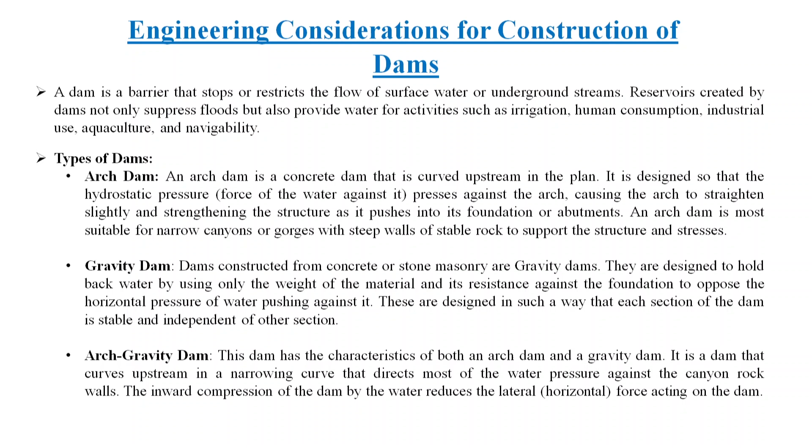So the types of dams are arch dam, gravity dam, arch gravity dam, and then barrages, embankment dams, cofferdam, concrete face, rock fill dams, earth fill dams, like this. So there are various kinds of dams.

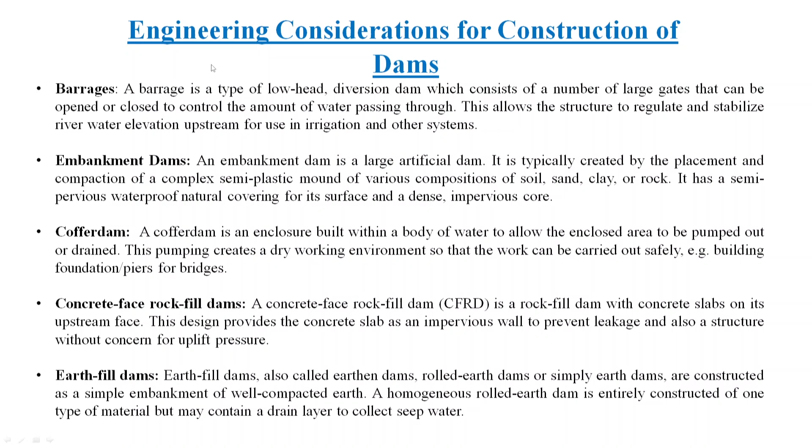I am not going into the individual properties, but if I look at some of them, for example, embankment dams are mainly prepared to restrict an event of flood, or to restrict water, or to store water for further irrigation purposes.

Then you can think of the buttress dam. Here you have a dam with this kind of water storage, and these kind of dams are also mainly used for irrigation purpose. Sometimes they also play a significant role in controlling an event of flood.

Then you have gravity dams like this, and also arch dam. These dams are more used for hydroelectric power generation. In case of a gravity dam, the front of the dam towards the downstream side of the river will be the heel, and the toe is towards the upstream side of the dam. Then you have the crest, and a large bottom or trough of this dam, which is why it is referred to as the gravity dam, having a vertical upstream side and an inclined downstream side, like this.

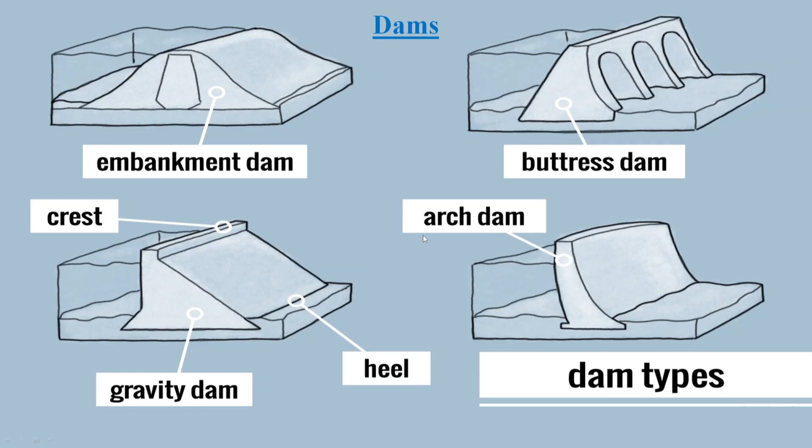In case of arch dam, these are arcuate or curved kind of dams, convex towards the upstream side and concave towards the downstream side. This kind of dam is generally used for generation of hydroelectric power.

So obviously there are several considerations for the construction of dams. The first one is the economic feasibility, whether it is possible to build a dam, because it involves large cost, labor and materials. Then bedding planes and strength, like I was referring to the different scenarios of slope stability based on the orientation of the bed, mainly the strike and dip direction. So your bedding planes and strength of the surrounding materials where you want to build a dam is a very important consideration.

Then again your feasibility and constructability, how large or small a dam will be depends on the feasibility of where you want to build that dam, and obviously durability and resistance to erosion. So preparing or constructing a dam in extremely turbulent water in a hilly region is a problem. Nowadays there are ways to support this kind of turbulence, but it is always a little bit problematic.

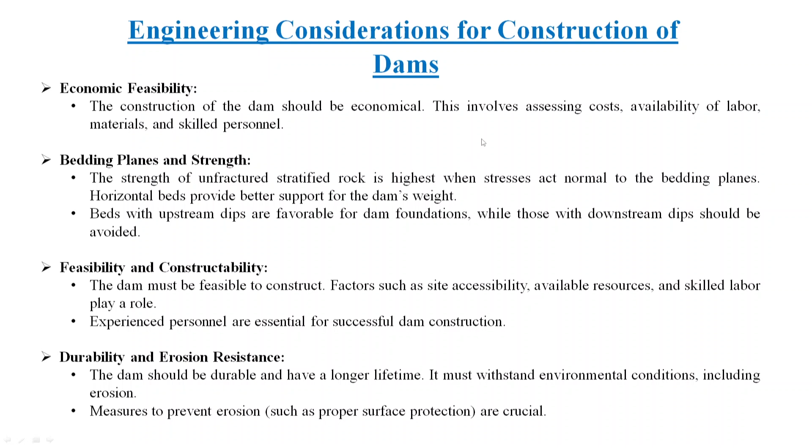But when the turbulence of the rivers drops down a little bit - I am not saying it goes into the mature stage, but even in the youth stage the turbulence is a little lower - in those areas you can prepare a dam relatively easily. And obviously there has to be measures to prevent erosion, because for a dam you are storing water, so there will be erosional activities related to the streams and rivers. These are the various considerations for construction of a dam.

Stability, saturation line and downstream face are also important. Stability depends on several other things, but the saturation line where water meets the dam should be on the downstream face. Proper drainage and seepage control prevent internal erosion and maintain stability.

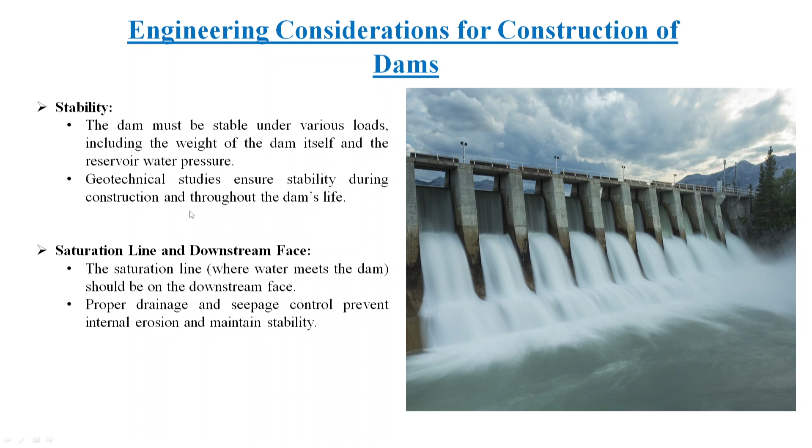So this is again a very important consideration whenever you are constructing a dam. So now if I look at this diagram again in relation to the orientation of the beds. So if you have a scenario where you have this W and T, T is nothing but the thrust force of the water reservoir, because you are storing a large amount of water. So there will always be a thrust on the walls of the dam, so that is considered as your thrust force. And you also have your weight force, the weight of the dam itself. It's a large-scale structure, so it will impose a large weight on the surface itself.

So based on these two components, if I simply make out the resultant vector, that is referred to as R here, or the resultant force of the dam, then if the angle of the resultant force is at a high angle with respect to the beds on which it is made, in that case it is relatively more stable with respect to the other cases. And this is possibly the most stable configuration, when the resultant direction of the force from the thrust force and the weight of the dam is at a high angle or even orthogonal to the dip of the beds.

So whatever water leakage will happen on the upstream side, it will not affect the dam itself and the downstream side. Whatever water leakage can happen will only happen on the upstream side. Then you have this kind of an orientation, where the resultant direction of the force is at a low angle with respect to the horizontal beds that are present. So with horizontal beds, though it is also quite stable, there is still some possibility of some leakage in the upper layers of this horizontal strata.

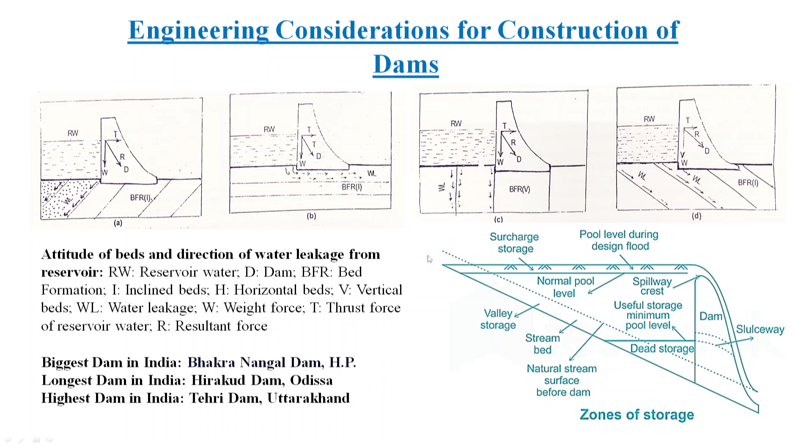Now, coming to tunnels, because tunnels are being made very frequently nowadays in India for both roadways as well as rail tracks. A tunnel is an underground passageway that is excavated through soil, rock or both. Tunnels are used for transportation, water conveyance, sewage and utility conduits as well. They have a long history of use dating back to ancient civilizations and have become increasingly important. Tunnels are being frequently made in India as well, and they are important in modern society for transportation and large-scale infrastructure development.

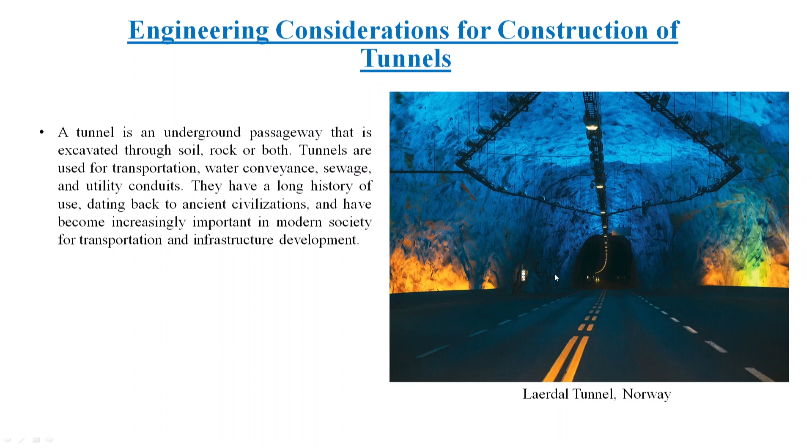So, this is a view of a tunnel in Norway. Now, there are again several types of tunnels. Transportation tunnels: simply, if you need to transport vehicles, rail or something else, you can transport through them. Utility tunnels: these tunnels are used to carry pipes, cables and other utility services like water, gas or electricity, sometimes telecommunication as well.

Mining tunnels: these are constructed in mining operations for extraction of minerals and ores. Hydroelectric power tunnels: these tunnels are used to convey water to hydroelectric power plants, which are again related to your dams. Then sewage tunnels: these tunnels are used to transport sewage from one location to another, usually from a treatment plant to a discharge point.

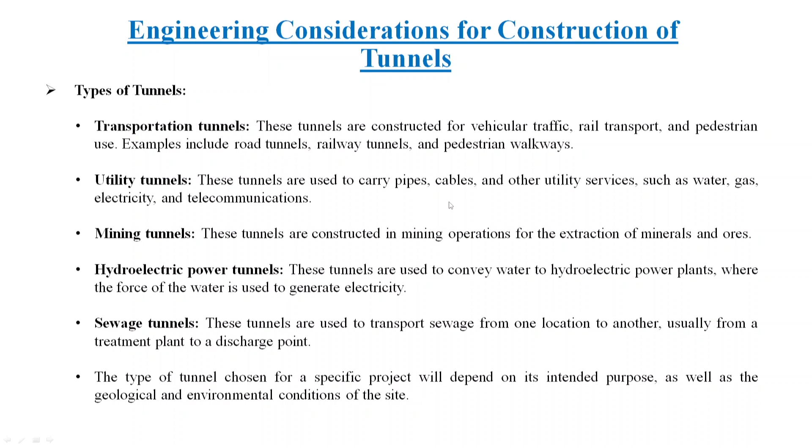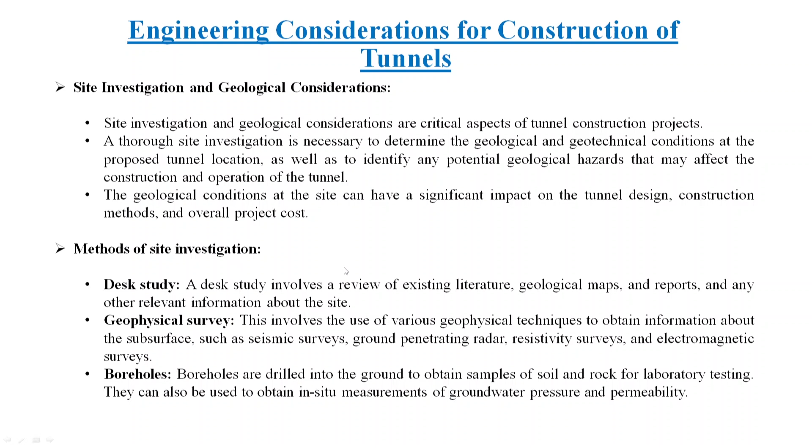The type of tunnel chosen for a specific project will depend on its intended purpose as well as the geological and environmental conditions available for the construction of that tunnel. So, again, for a tunnel, like a dam, you have to carry out site investigation and other geological considerations, and there are various methods for these things, starting from desk study, meaning existing literature, geological maps, geophysical surveys, boreholes and also different kinds of strength measurements. Then you can directly look into the rock layers and measure the orientation of the different formations through which you are supposed to drill or make a tunnel.

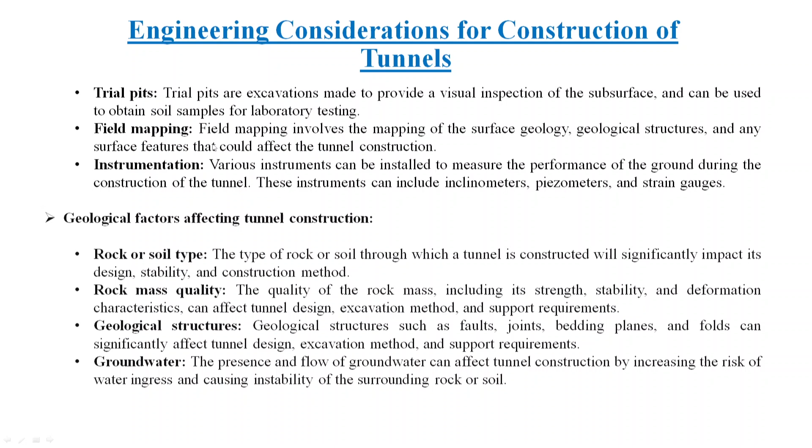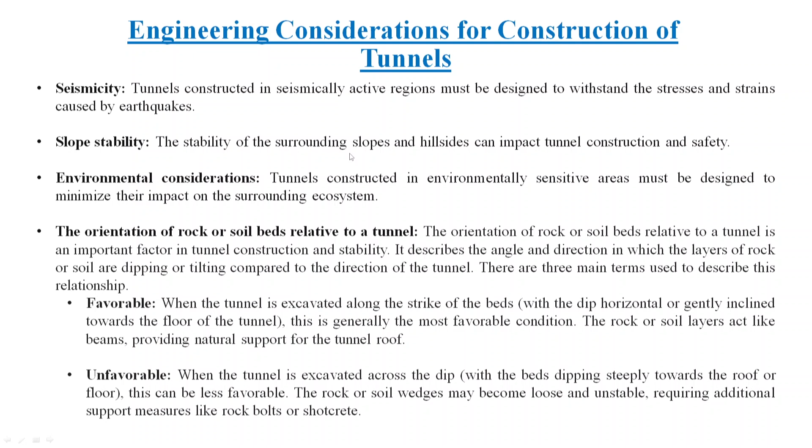Then geological factors that might affect tunnel construction are rock or soil type, rock mass quality, geological structure, and again groundwater also plays an important role. Also, apart from that, large scale seismic activities, slope instabilities and also stability and environmental considerations are important before proposing the construction of a tunnel. So, the orientation of rock or soil beds relative to a tunnel is extremely important. We will be looking at this example now.

So, regarding tunnels and their stability, if I want to judge with respect to the geological considerations that I should consider before proposing or planning the construction of a tunnel, then the first one: a stable tunnel with horizontal beds with uniform pressure from all sides. So, it is a kind of hydrostatic pressure, uniform pressure from all sides. So, stability will be maintained if you are only penetrating one thick layer of the horizontal bed. It becomes unstable if it is present within dipping beds. Like, your tunnel is going across a few beds, so it becomes unstable within dipping beds.

Orientation of the tunnel parallel to the strike of beds: oblique pressure is getting applied here like this. So on one side of the tunnel you have a larger pressure with respect to the other side. Tunnel length perpendicular to the strike of the dipping beds also poses some problems, because on some parts of the tunnel there will be oblique pressure. Tunnels across vertical beds with the top arch are again generally stable in nature, because this arch will support this vertical stress, like we discussed about the support offered by the non-rotational compression in the arch system in the Roman civilization, or the structures that were prepared during the Roman time.

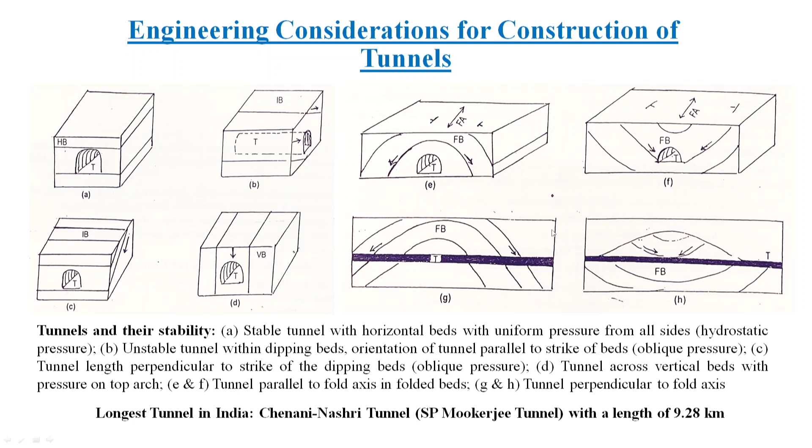The longest tunnel in India is the Chenani Nashri tunnel, also known as the Syama Prasad Mookerjee tunnel, with a length of 9.28 kilometers in the state of Jammu and Kashmir. Then finally we will now be looking into the engineering considerations for construction of bridges. So a bridge is a construction designed to span a physical obstacle such as a river, valley, road or railway without obstructing the passage underneath.

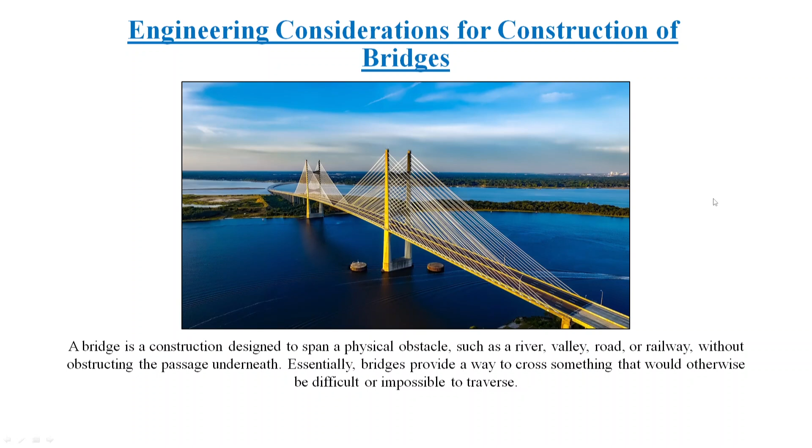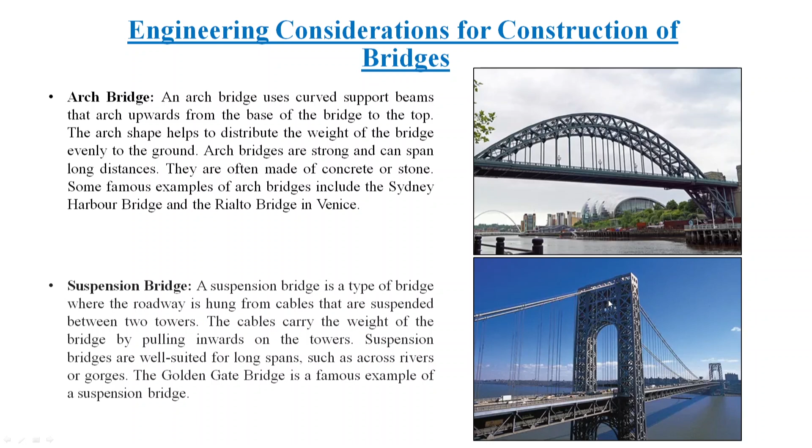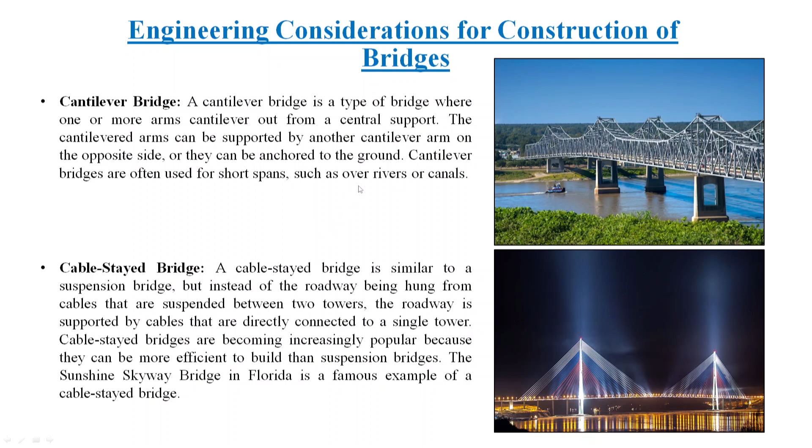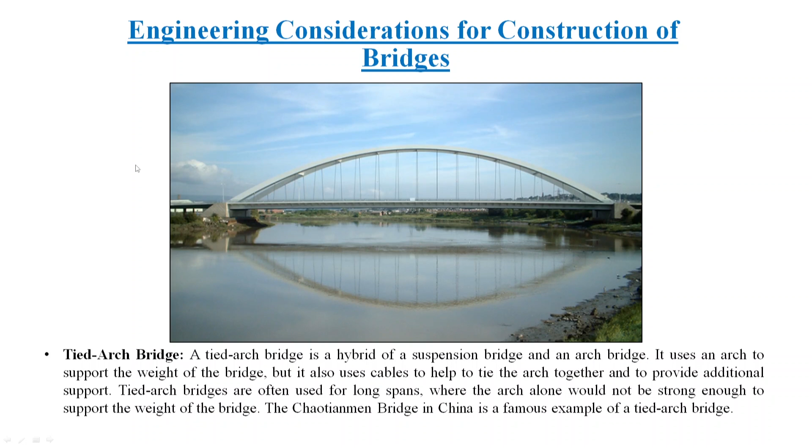Tied arch bridge, this is an example; you can think of the famous bridge of Sydney just near the Opera House, where you will get this kind of tied arch bridge. But for bridges as well, you have to go on in the same manner. You have to select the site, design the foundation, look for the foundation material, and look for the feasibility.

Also, in case of bridges, whenever we are, for example, constructing a bridge across a river, you have to always try to get the narrowest channel width. But if at some place there is no other option, then you have to look for reliable foundation material with little or no instability on the two sides where the main pillars are present to support that bridge.

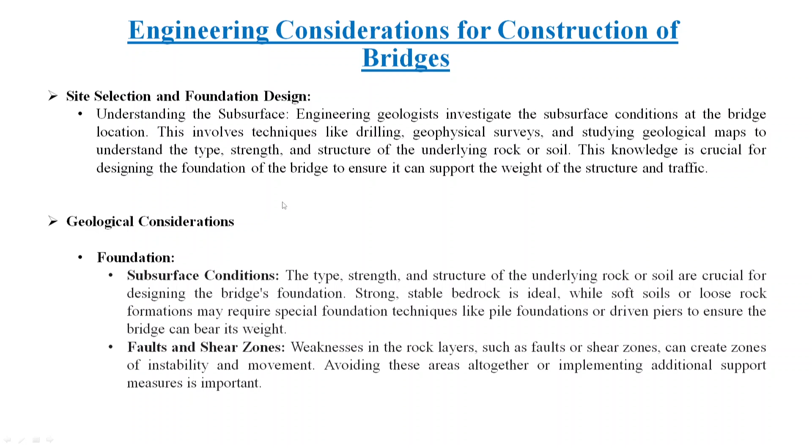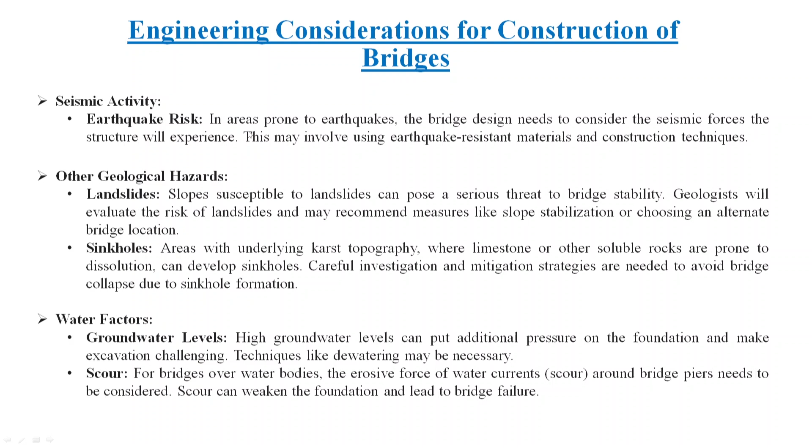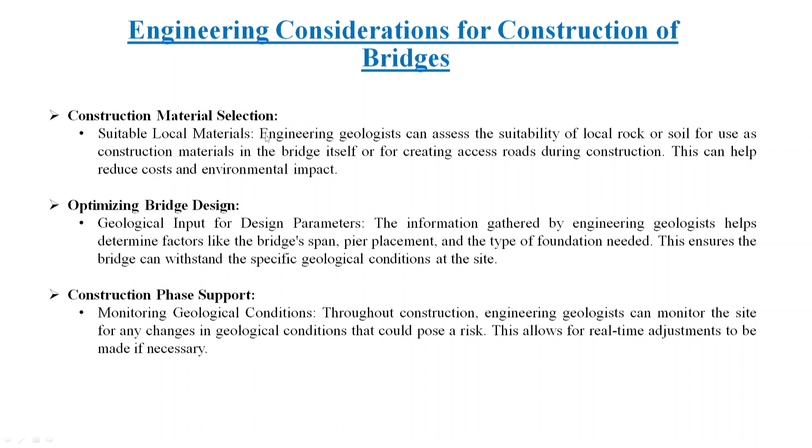So, the geological considerations include the subsurface conditions, faults and shear zones, seismic activities. Other geological hazard assessments are necessary, like whether there is a probability of landslide or not, whether there is formation of sinkholes or not, like we discussed in groundwater, and water factors like groundwater levels and scouring of materials. So, construction material selection and bridge design are also extremely necessary before thinking of constructing a bridge.

Based on the types of foundation rocks and stability of bridges, I will look at the first one: stable bridge on uniform foundation rock type. The foundation rock type is not changing much, it is uniformly bedded, and the rock type is, for example, granite gneiss, so there is no change in the rock type, and you can put two abutments at the two ends and support your bridge with the help of pillars.

Also across the overburden that is present: if you are constructing a pillar on the overburden, there is high probability that with time that overburden can get eroded very easily, and the pillar as well as the bridge will become unstable over time. So, that is why you have to penetrate the pillars or piers through your overburden.

Then in the second case, unstable bridge on composite foundation rock type: if there is a fault or a shear zone, that imposes a threat to the foundation of the bridge. It will be risky to construct any bridge in this kind of large scale fault or shear zone, because these faults can get reactivated again and again, and if there is an abutment near the fault or on, for example, the hanging wall of the fault, there is high probability that in an event of reactivation, that abutment might get destroyed due to the movement induced by the fault.

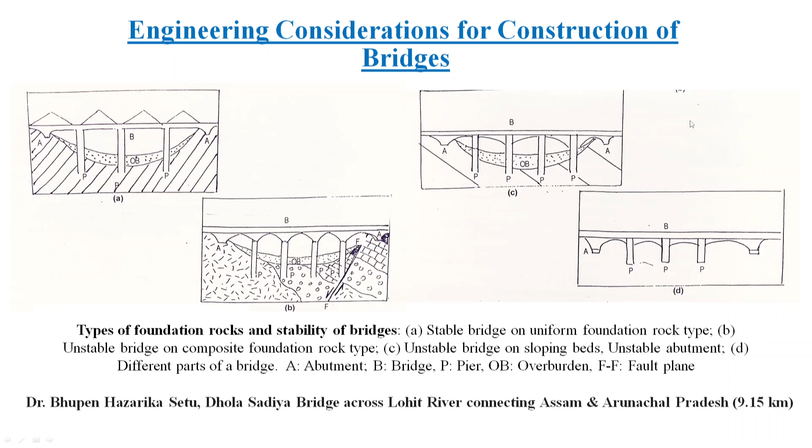For example, just to mention one Indian example, the Dr. Bhupen Hazarika Setu, or the Dhola Sadiya bridge across the Lohit river connecting Assam and Arunachal Pradesh, is one of the modern bridges we have in India, and it has a length of around 9.15 kilometers.

So, with this I would like to end my discussion on the geological considerations for the construction of dams, tunnels and bridges. Thank you.